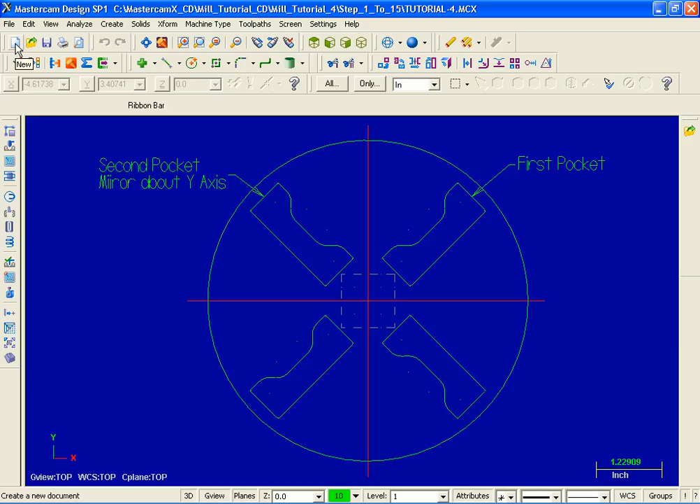I'm going to move up to the top left corner of my screen and hit the icon for new part. The center of the grid is x0, y0, our origin. To start, we're going to create a circle.

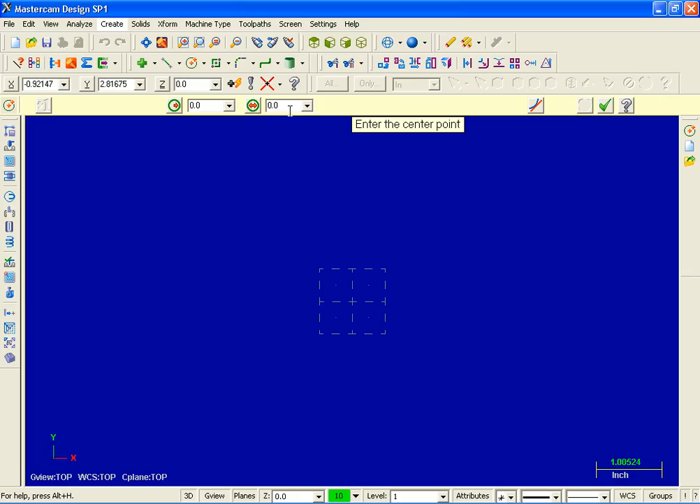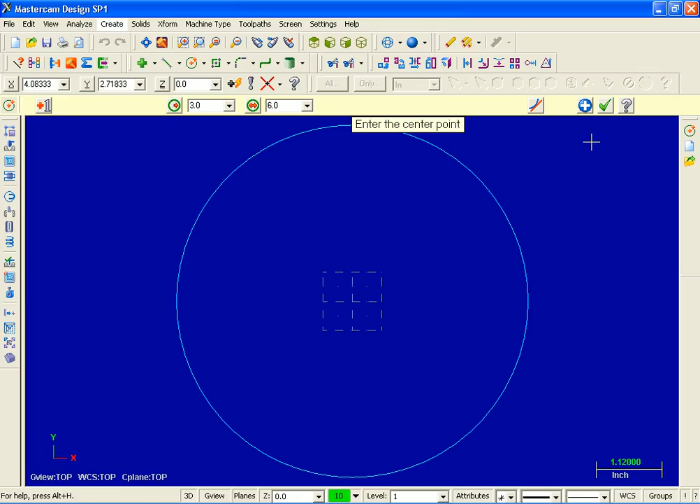I'm going to move up, select create, arc, and then move over and pick create circle center point. Now the first thing I'm going to do is input the diameter, which is 6, and then when prompted for the center point, I'm going to move on down and pick the center of the grid, the origin. I'm going to move on up and also pick screen fit. Everything looks good. Going to move over to the right and click on OK.

For step 2, we're going to create a vertical and horizontal line. But before I do that, I'm going to change the color to red. Moving down to the bottom of the screen, I'm going to select System Color, and in the color palette I'm going to select red. As you can see, the current color has the number 12 assigned to it. Everything looks good. I'm going to pick OK.

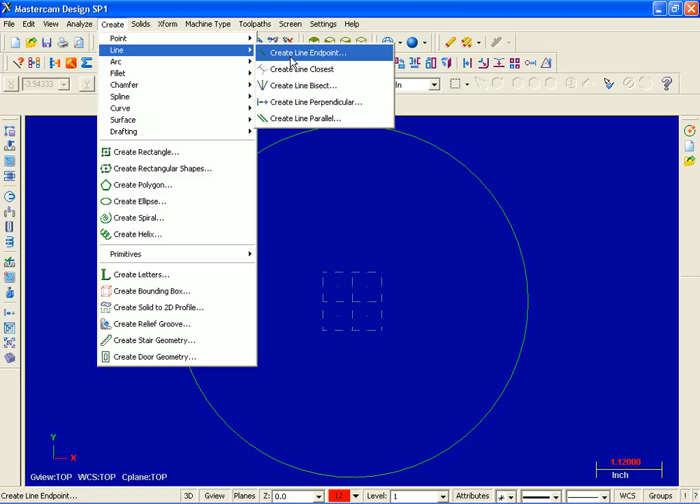Now let's go draw some lines. Create line and create line endpoint. I'm just going to move the prompt over to the right. To start, I'm going to select the vertical icon so we lock in just to vertical lines.

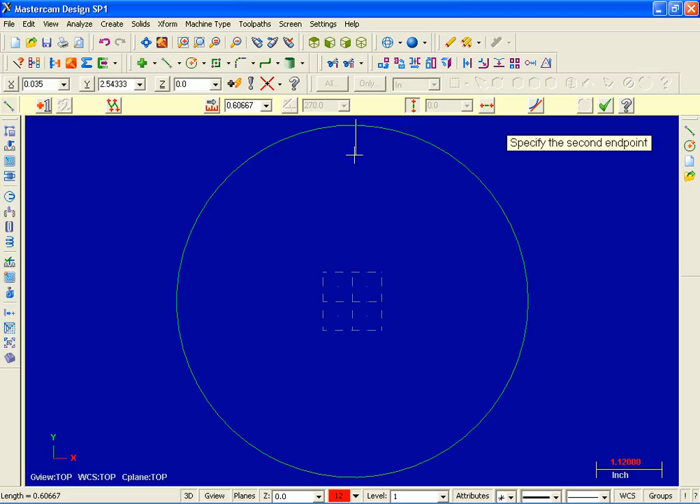Now when prompted, specify the first point. I'm going to pick a point just outside the circle, round about 90 degrees, and for the second point I'm going to move down and pick a point approximately at 270. Now the next prompt, enter the x coordinate. I'm going to move up and input 0. And as you can see, that line is locked in at x0.

I'm going to select the apply button. The next line, I'm going to select horizontal. When prompted, specify the first endpoint, I'm going to move down and pick a point just to the right of the circle, approximately at 0 degrees. For the next point, I'll move over to the left and pick another point outside the circle, round about 180. This next prompt, enter the y coordinate. I'm going to type in 0 and hit enter, and as you can see, that line is locked in at y0.

Everything looks good. I'm going to pick OK. Let's move on to step 3. We're going to create some polar lines. Back up, create line and create line endpoint.

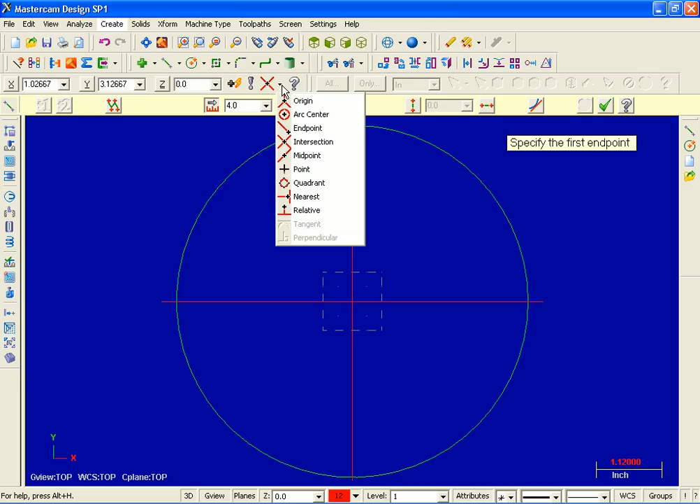First thing I'm going to do is move down, click in length, type in 4.0 for the length of this line, and then tab over. For the angle, I'm going to input 45 and then hit enter. When prompted, specify the first endpoint, I'm going to move up, open this drop down, and then pick origin. And there's our line. Everything looks good. Going to select apply.

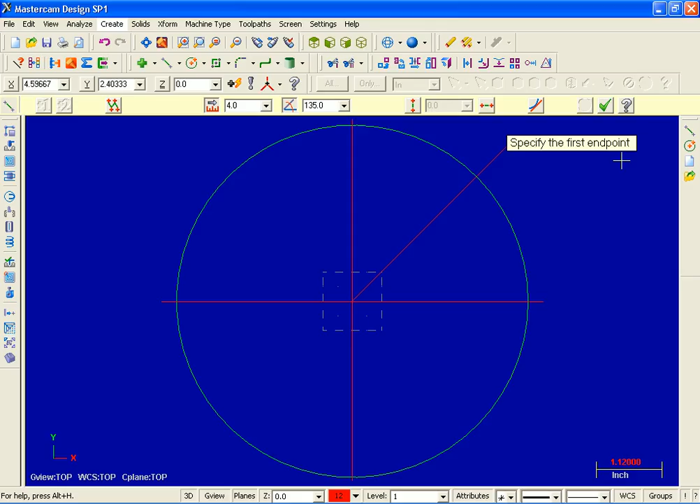One more line to do here. As you can see, the length is set to 4 inches. I'm going to tab over, but this time, for the angle, I'm going to type in 135. That's 90 plus 45, and then hit enter. When prompted, specify the first endpoint, I'm just going to move up and pick on this icon for origin. There's our line, everything looks great. Let's move up now to the right and pick OK.

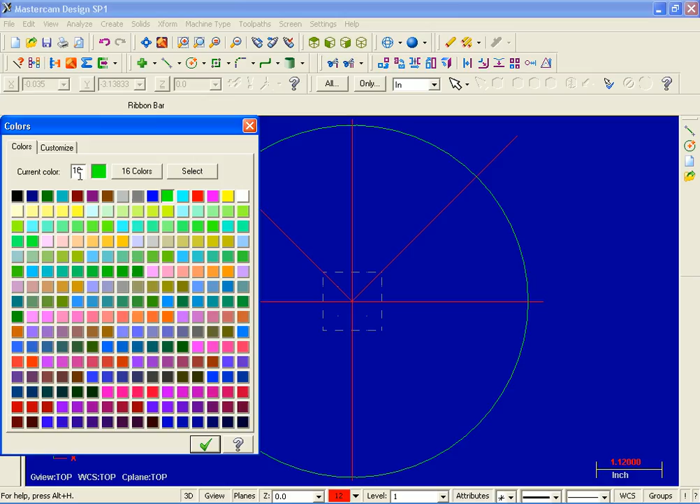Moving on to step 4, we're going to create a parallel line. But before that, let's change the color back to green. Move down to System Color at the bottom of the screen, up to the color palette, and pick green. We're back to color number 10. Then hit OK.

Let's go to Create Line, then Create Line Parallel at the bottom. To begin with, I'm going to set up the distance, 0.75. When prompted, select a line - I'll pick the last line we created. For the offset direction, I'll pick a point to the right. Everything looks great, so I'll hit OK.

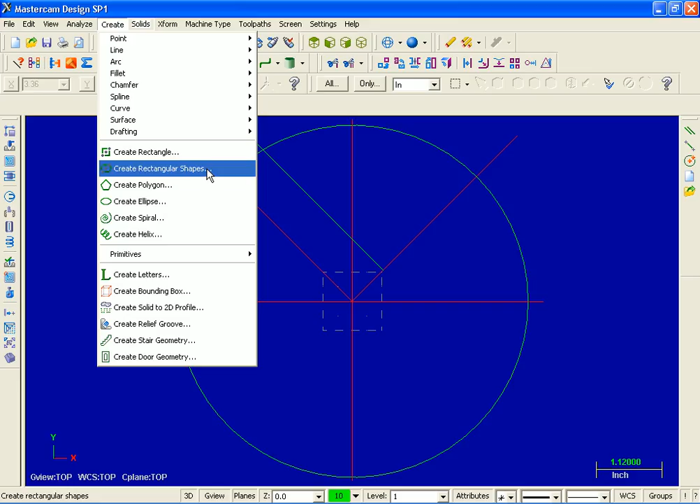Now we're going to move on to step 5, where we'll create a rectangle. Let's go into Create and create rectangular shapes. The radio button is turned on for base point. For the width, I'll input 2.0, and for the height, 0.75.

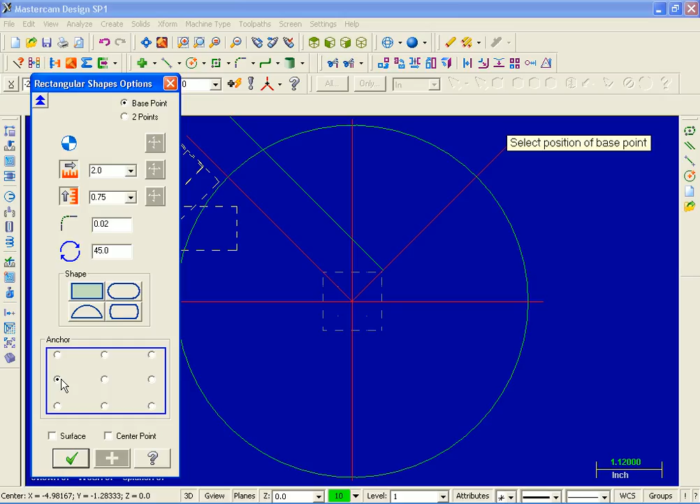I'll hit expand to see some other options to change. For the radius on the corner of this rectangle, I'll put in 0.02, and for the angle, I'll set it at 45. For the anchor position, I'll pick this point on the left midway. That looks good, so I'll move to the graphics screen. There's our rectangle. For select position of base point, I'll snap to this point. Everything looks good, so I'll go back and pick OK.

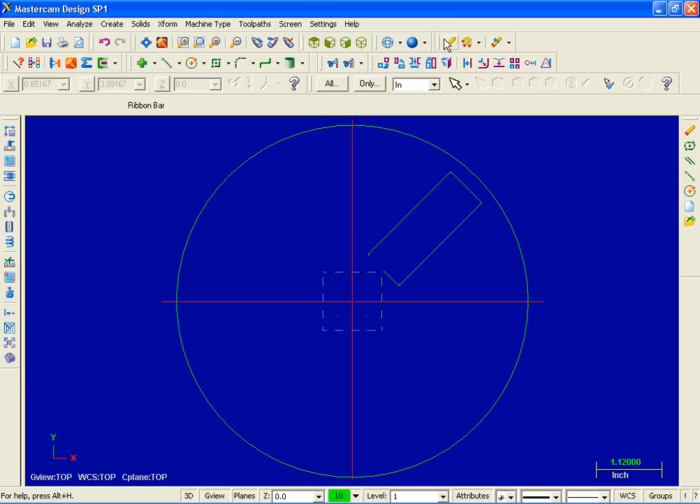For step 6, I need to delete some of the construction lines we created earlier. I'll select this line at 45, this line at 135, and this line - three lines total. Now I'll hit the icon for delete entities, and also do a repaint.

Everything's looking good. Let's move into step 7, where we'll create some parallel lines on the inside of the part. But first, let's zoom in on this pocket area. I'll select zoom window and draw a window around it. Now let's go into Create Line, then Create Line Parallel at the bottom.

When prompted, select a line - I'll pick this line on the left hand side. For the next prompt, select the point to place a parallel line through, I'll pick a point to the right. Now for the distance, I'll input 0.35 and hit enter. Everything looks good, so let's hit apply to continue.

For the next prompt, select a line - I'll select the line we just created, then pick a point just to the right. This time, for the distance, I'll input 0.25. Everything looks good, so let's go back and hit apply.

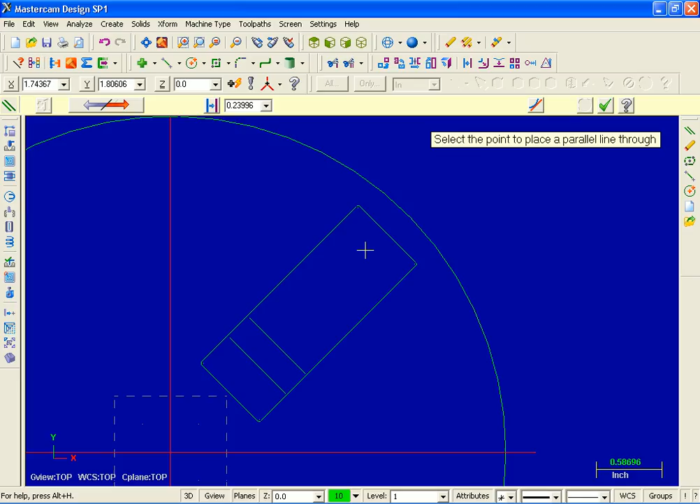For the next prompt, select a line - I'll select this line and pick a point below. Now back up for the distance: 0.35. That looks good, so I'll hit apply.

For this next line, I'll pick the last one and then pick a point just below. For the distance, I'll input 0.25. Back up again, hit apply.

For the next line, I'll pick this line in the pocket and pick a point just below. Now up again to the distance, I'll input 0.275, then hit enter. Everything looks good, so I'll move over and hit OK.

Now we're going to move into step 8. We're going to extend a couple of lines. Let's move over now to edit, trim break, trim break.

I'm going to select the icon for trim one entity, then select this line in the pocket. When prompted, select the entity to trim extend to, and I'll pick this line. As you can see, that line has been extended to this line.

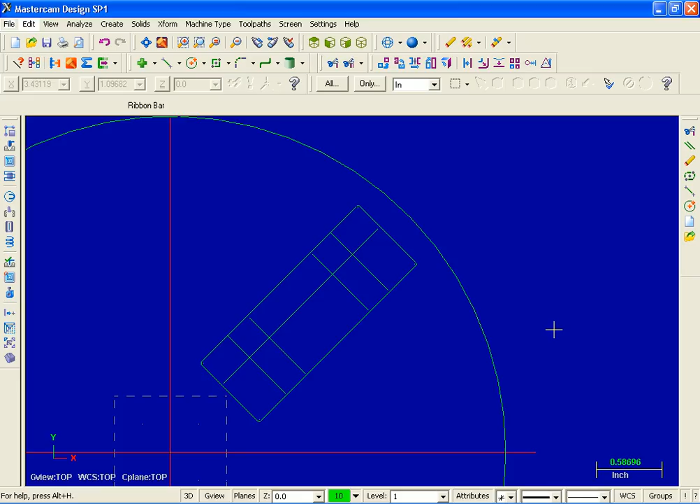Now we're going to move on to step 9. We're going to create some lines. So let's go into create line and we're going to use create line endpoint. Now when prompted to specify the first endpoint, I'm going to move on down. As you can see, it's snapped to the intersection of these two lines.

I'm going to move on over and snap to this point. Again, I'm going to snap to this point and then move on down and snap to that point. Everything looks great here, so back up and hit OK.

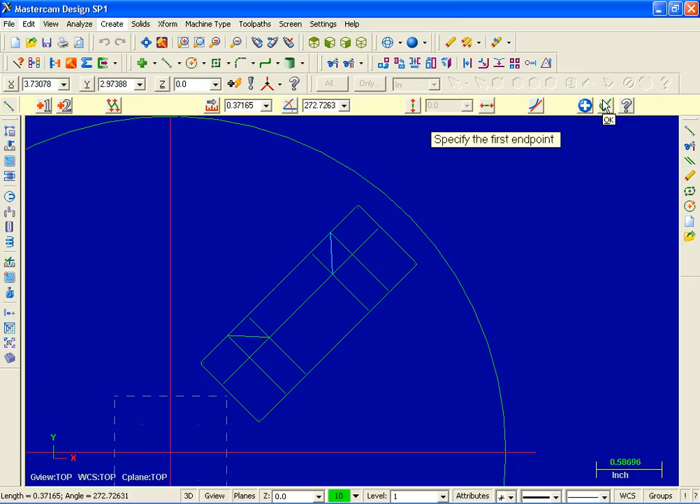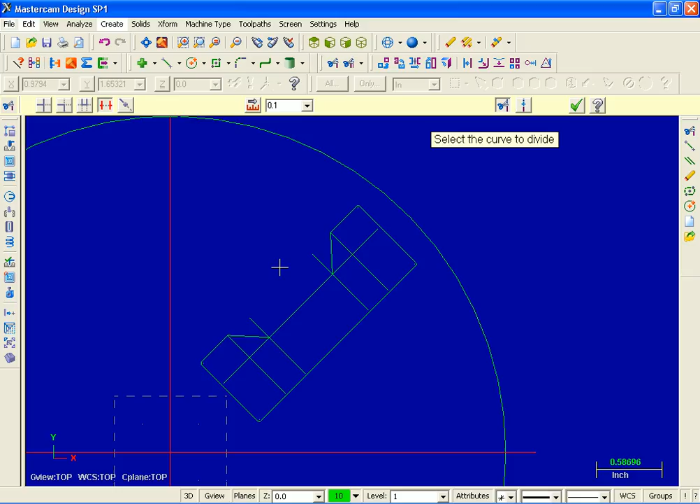For step 10, we're going to go into trim divide. So edit, trim break, and this time I'm going to pick the icon for divide. When prompted, select the curve to divide, I'm going to move on down and select this line. As you can see, it's been trimmed away. Let's move on up and pick OK.

Next, for step 11, we're going to do some filleting. Create, fillet, and fillet entities. Let's set the radius up, which is 0.3, then hit enter.

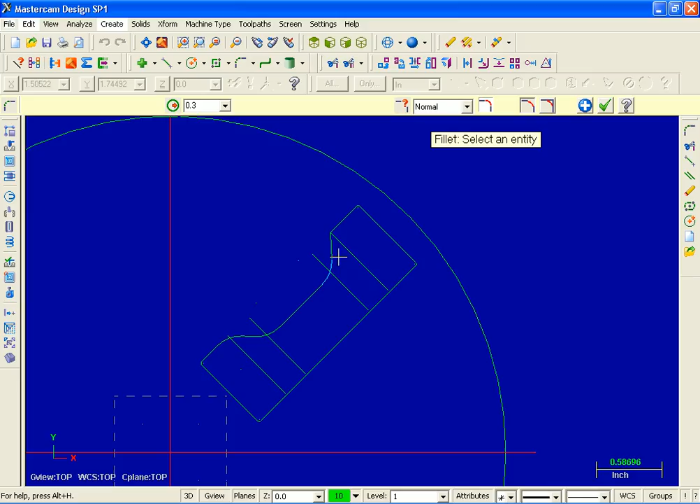Select an entity. I'm going to move on down and pick this line and then this line. I'm going to select this line and then this line. Everything's looking great. I'm going to pick this line and then this line, this one, and then this one. So everything's worked out fine there. Let's go and pick OK.

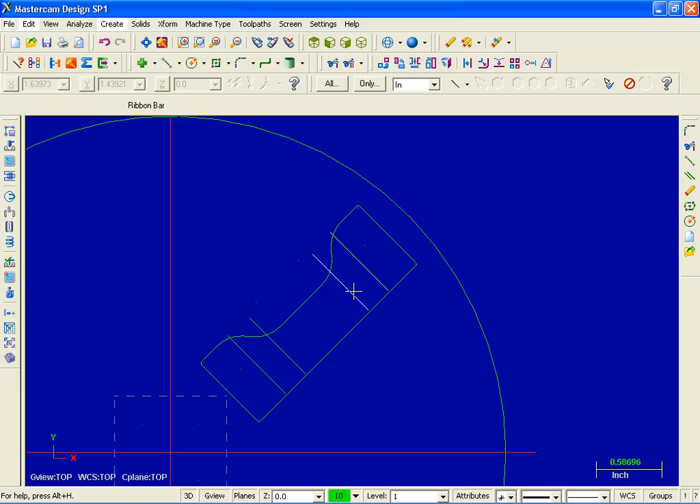For step 12, we're going to delete some of our construction lines. I'm going to select this line, moving on down, this one, this construction line, and this one. I'm going to move on up to the top and select delete entities. I'm also going to move up and select screen fit.

So there's our pocket. For step 13, we're going to mirror this pocket about the y-axis. So let's go into Xform and mirror.

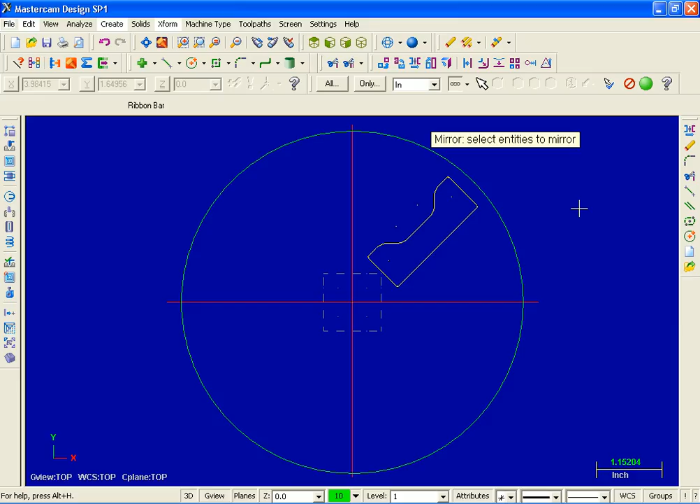Now, when prompted to select the entities, let's move on up and select chain. I'm going to move on down and pick this line in the pocket, and as you can see, it's chained all the entities in that pocket. Now to end my selection, I'm going to go up to the right and hit End Selection.

For mirror, I've got copy turned on, so I'm going to keep the original geometry, and what I'd like to do is mirror about the Y axis. As you can see, the preview is turned on. I'm also going to hit fit as well. Everything looks great here, let's go down the bottom and hit OK.

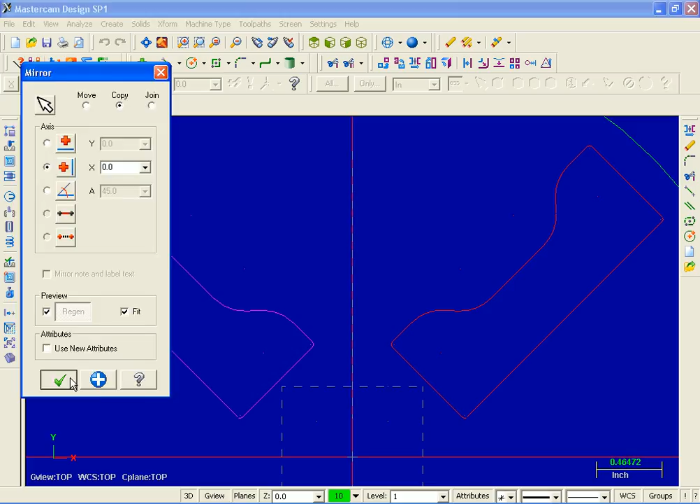Let me do a screen fit. What we're going to do now is create the pockets at the bottom, step 14. What we're going to use this time is X-form rotate. So again, let's go up into X-form and then pick rotate.

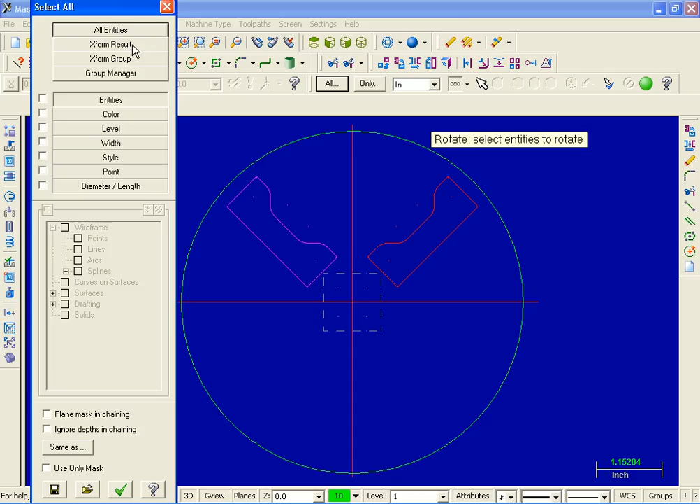Now select entities to rotate. What I'm going to do is select the all button, and then moving over to the very top, I'm going to select X-form result, and as you can see, this pocket is highlighted on the left, so everything looks great. Let's pick End Selection.

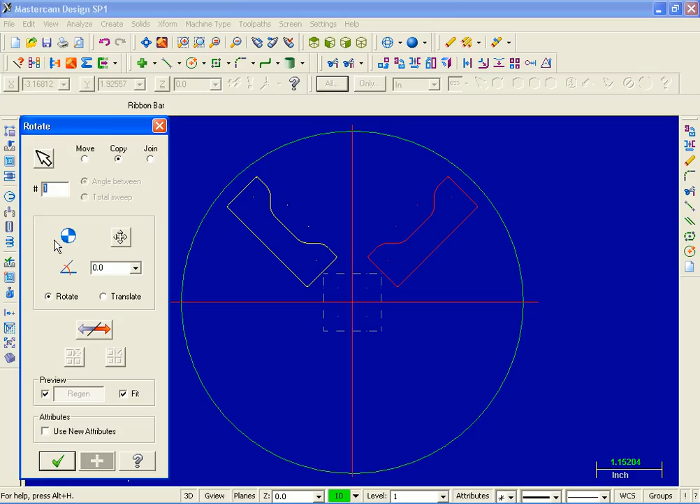Now in the rotate dialog box, copy is turned on. For number of steps, I'm going to change that to 2. Moving on down, the angle, I'm going to change it to 90. Everything looks great, I'm going to pick OK.

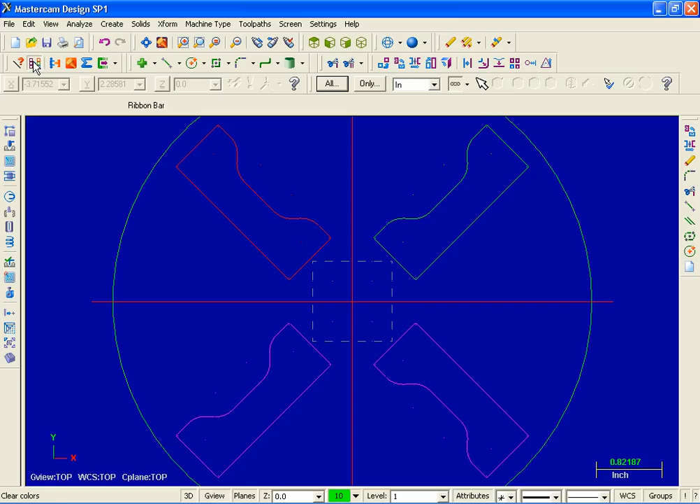Let's move on up, screen, clear colors, and also do a screen fit. So it's looking good. We've got 4 pockets for the price of 1, so that's a good deal.

For the last step, step 15, we're going to save the geometry. File, save as, and then you can input the name of your file. This completes this video segment. Thanks for watching.